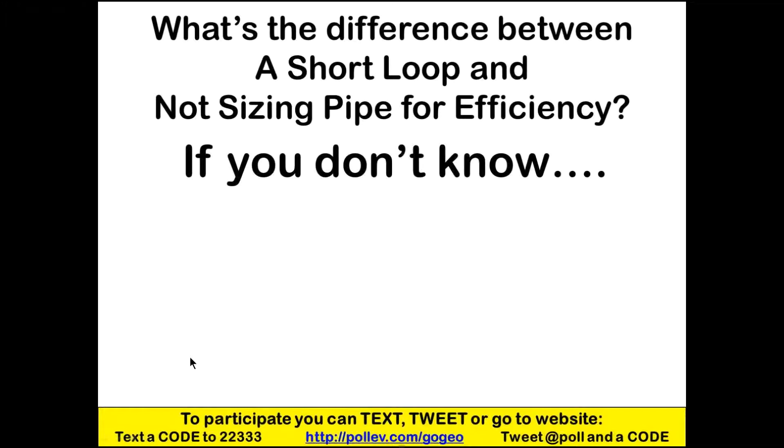Anybody in the geothermal industry knows not to short a loop. You've got to have adequate loop to keep the temperatures in that range that we have deemed acceptable in the industry, roughly 30 to 95 degrees. If you can stay within that, you're doing okay. But if you can't answer this question, then in addition to not shopping for eggs, I would not want you to design my geothermal system.

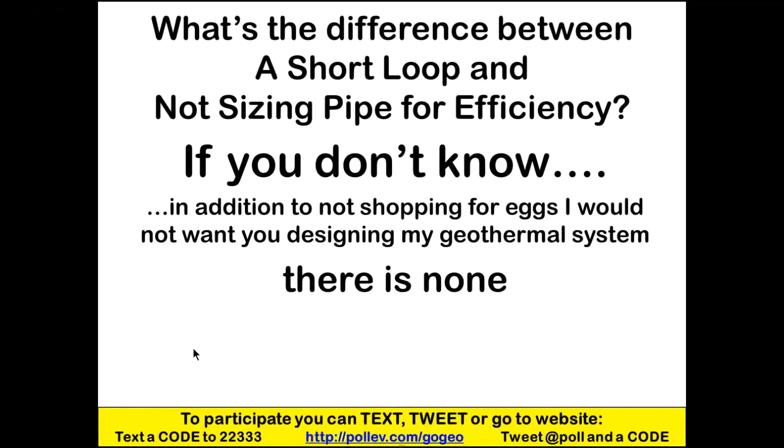Because frankly, there is no difference between a short loop and not sizing pipe for efficiency. Customers are paying way too much money for a geothermal system to end up with undersized pipes because that's the way we do it. They both cheat your customer.

CV, it's a term we often see on valve spec sheets. It's quite an interesting concept. And now I'm going to ask you guys, can you tell me what a CV is? What is our level of competence?

Often referred to as a flow coefficient. And knowing what it means and how to use it is very important in the design process. So I'm glad we've got an honest group of folks out there, because quite honestly, when I talk to folks, they don't really know what it is.

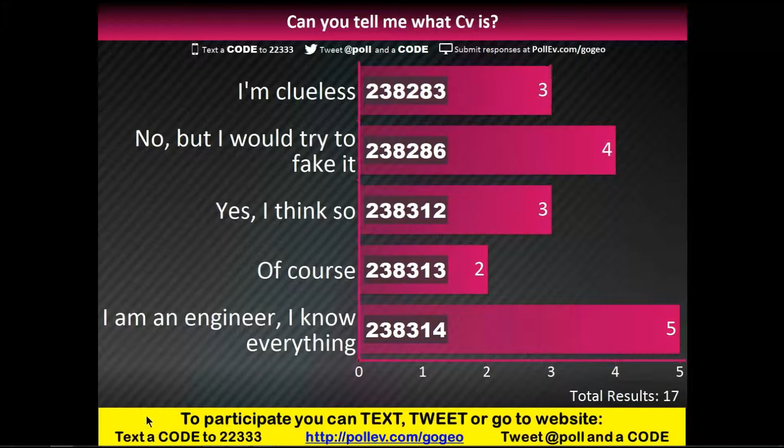So let me find my mouse again to click somewhere. There we are. It is the flow rate in gallons per minute at which the pressure drop equals 1 psi. It's very handy because if you know the CV rating, you also know that it correlates to 1 psi. And from those two data points, you can calculate a pressure drop rather easily.

So in this graph, I've illustrated this 100% to be the CV. You may have a valve with a CV of 20. So that means at 20 GPM, you've got a pressure drop of 1 psi. And if we double the flow rate, indeed, our pressure drop goes up by a factor of 4. It's going to obey that squared relationship.

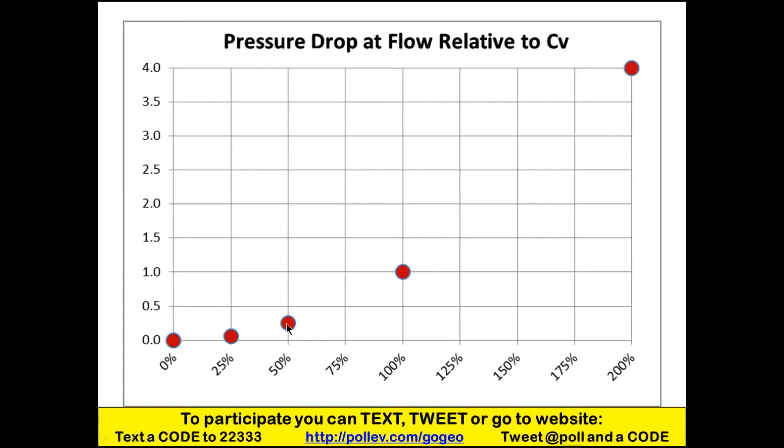And if we reduce the flow rate to perhaps half, 0.5 squared is 0.25, which now gets our pressure drop down to 0.25 psi. So starting with this value right here, which is your CV rating, down here, could be 10, could be 20, could be 200. But starting from that point, you can reduce the flow rate through that device, and the pressure drop will drop according to this parabolic relationship.

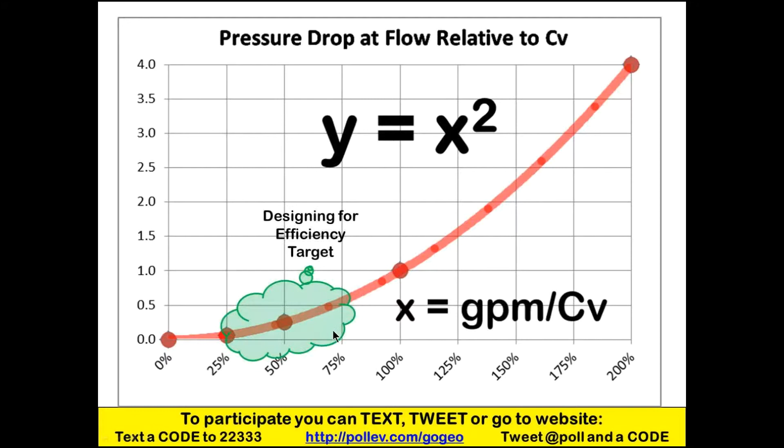And I'm suggesting that we want to design systems so that every element of the system - and CVs are not applied only to valves, they are also applied, you can calculate a CV for everything. A heat pump could be expressed as a CV, pipe, lengths of pipe. So my point is, stay on top of those CV numbers for elements in your system and try to pick a size that allows you to stay down in this regime.

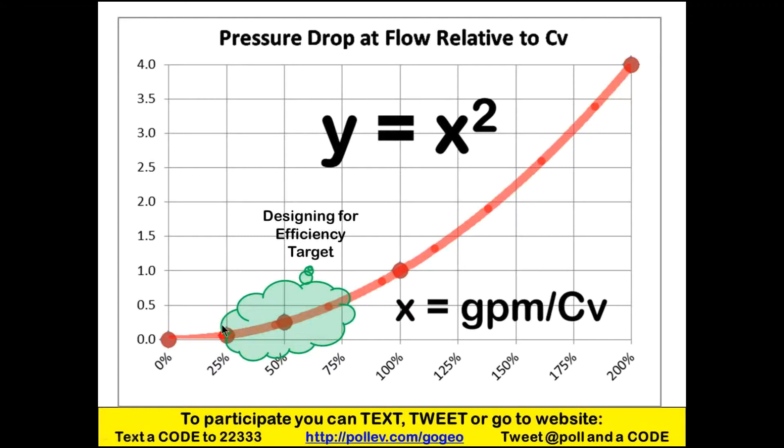Now, how do you size your pipes? It's a question I ask all the contractors that I deal with. Well, how are you picking that size? It could be by experience, I simply know what size to use. And I'll tell you, there's a lot of guys out there that'll tell you that.

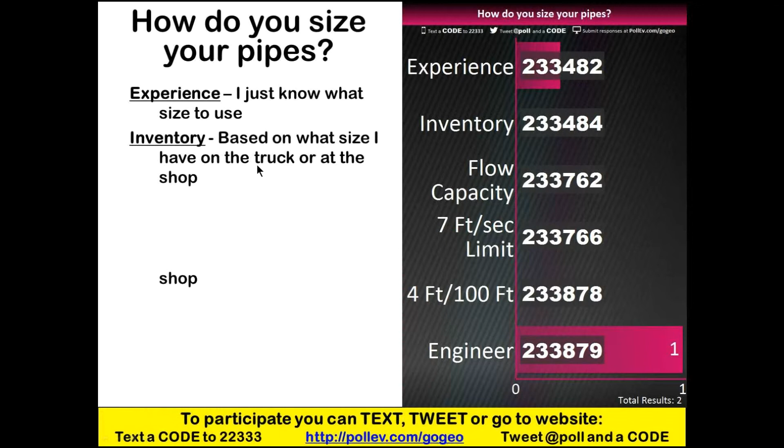Inventory. Oh boy, that all too often becomes the selection means. What do I have in the truck? What do I have in the shop? What can I get right away? So we end up picking pipe sizes that may end up penalizing a system.

How about flow capacity? Sort of like experience. Everybody believes that a certain pipe can handle so much flow, and it's strictly based on diameter. 7 feet per second is one of those boundaries that we often define not to exceed that high a velocity. 4 feet per 100, one of the most common design practices in the engineering community.

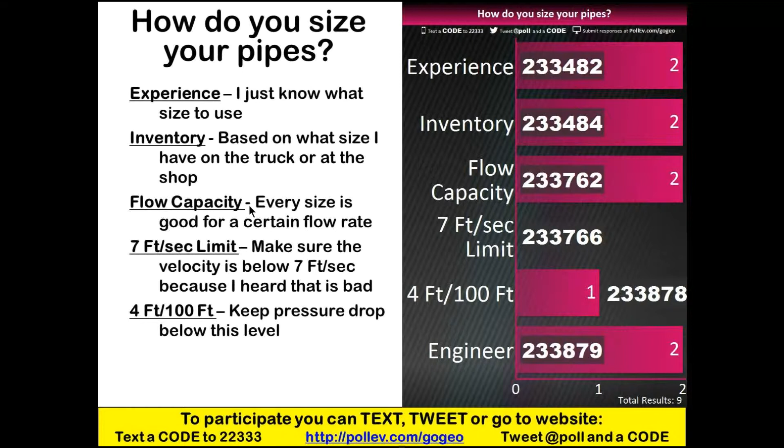And of course, the engineer. And we all believe what he tells us. So indeed, it's all over the place.

And what I'm going to suggest to you is that none of these are right. You really have to look at the application, the length of pipe. You cannot afford to run 1,000 feet in a pipe that gives you a pressure drop of 4 feet per 100. That's 40 feet of head loss just because you got to go a long ways.

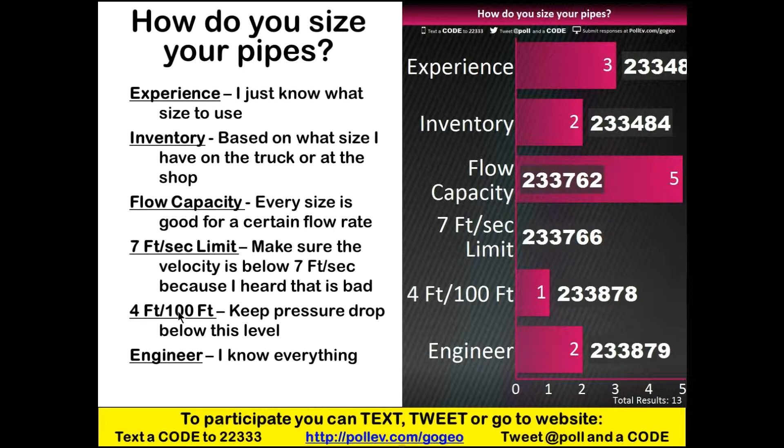Geothermal deserves better. Because not all pipe materials are the same.

High density polyethylene DR11 is pretty much the norm in our industry. And with the introduction of PE 4710 or the ISO standard PE 100, these are the stronger resins, and we're seeing a movement towards a little thinner wall as a result. We can do copper piping inside the building. Certainly outside the building, only HDPE. Inside the building, we have a lot of choices. And the question is, how do these affect the performance of the system?

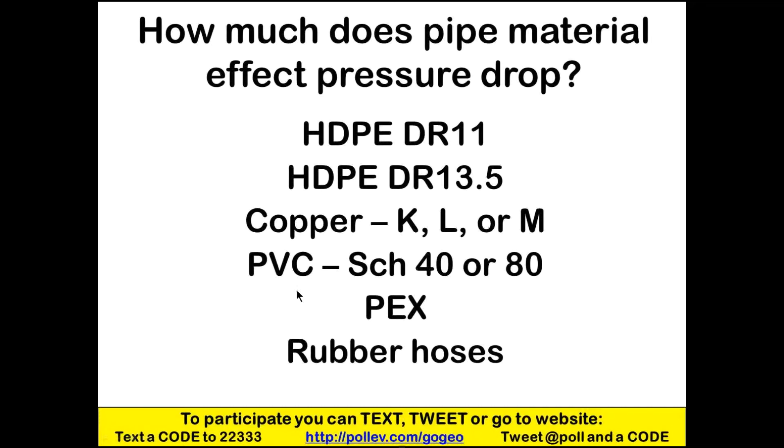You notice I didn't even put steel on here because frankly, I don't like to see steel pipe in a geothermal system. But anyway, here's a table illustrating the inside diameters of the various pipe materials for the smaller pipe sizes. Now granted, as you get into the bigger pipe sizes, you won't see the big variation in diameters as much, but this sort of illustrates my point.

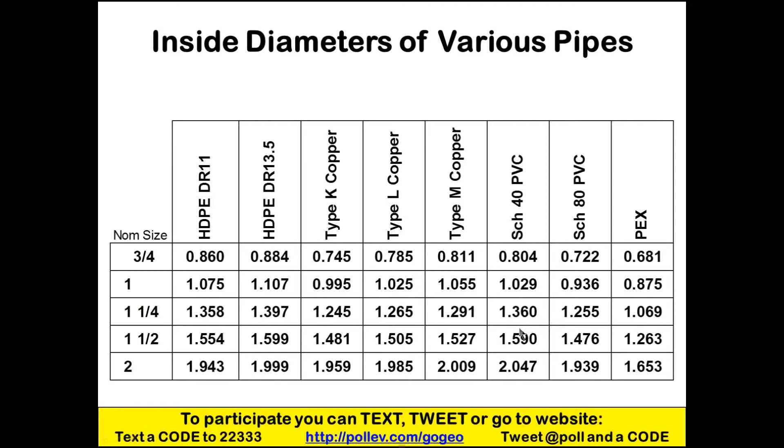And I, for one, can't determine a whole lot from a bunch of numbers just by looking at it. So let me do this. If it's smaller than DR11 HDPE, I put the red background. If it's bigger, I'll put the green background. So we've got PEX tubing over here that is a good 20% smaller inside diameter for the same nominal size.

A lot of guys use PVC, and it makes them feel better to use Schedule 80 because it's stronger, it'll hold up better. But they're paying a big price because Schedule 80 will have a much smaller inside diameter. What happens to the CV of a given length of pipe? Our CVs for Schedule 80 PVC are a good 20-30% lower, so they can accommodate 20% less flow and have the same pressure drop as DR11 polyethylene.

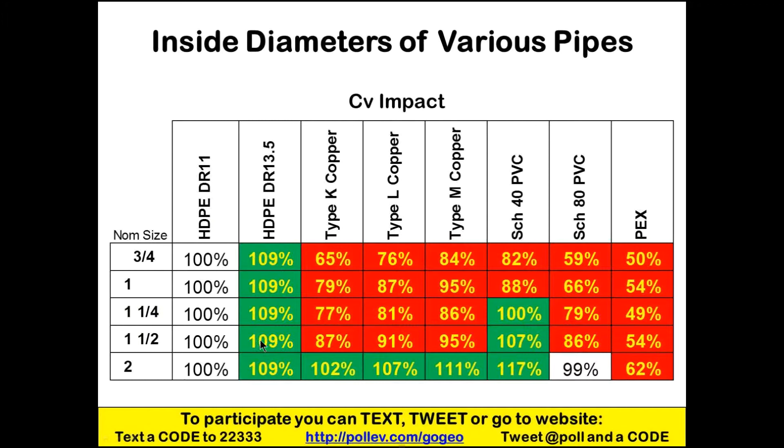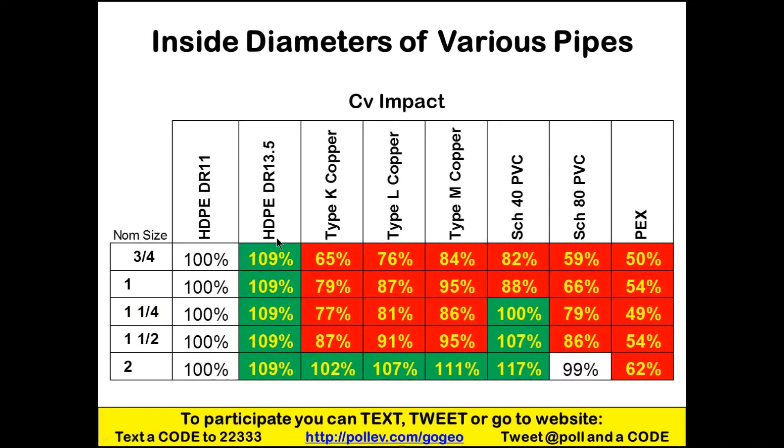What's interesting, you can see the simple move to go to 13.5 dimension ratio, we open up 9-10% more flow capacity at the same pressure drop. And there's fundamentally less material in the pipe. Now, it won't necessarily cost less because the pipe manufacturers have figured out that using the stronger resin deserves a little higher price, but indeed it is less material, more sustainable.

Looking at pressure drop impact, basically inverting the CV, we can see the pressure drops could be 15, 20, 30%, even 200% higher for different materials. So you can't simply pick a nominal size and say it's good for a certain flow rate.

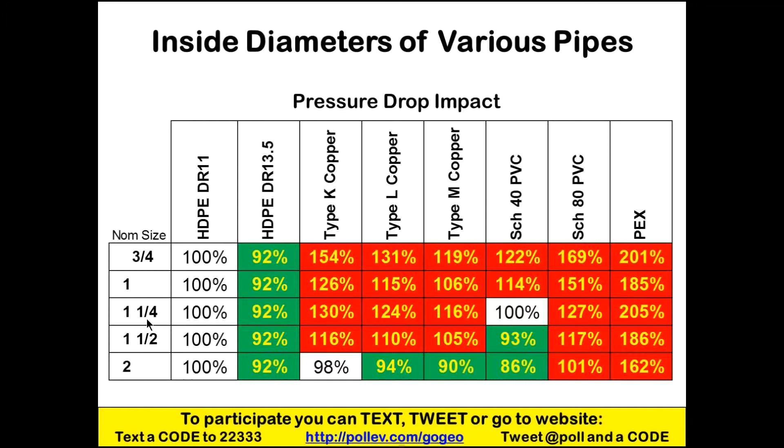Pipe sizing for geothermal. Don't cheat your customer. Be generous with pipe size. Yes, it's going to cost him more money. But guess what? The entire geothermal system is going to cost him more money. And he's not buying the word geothermal. He's buying performance.

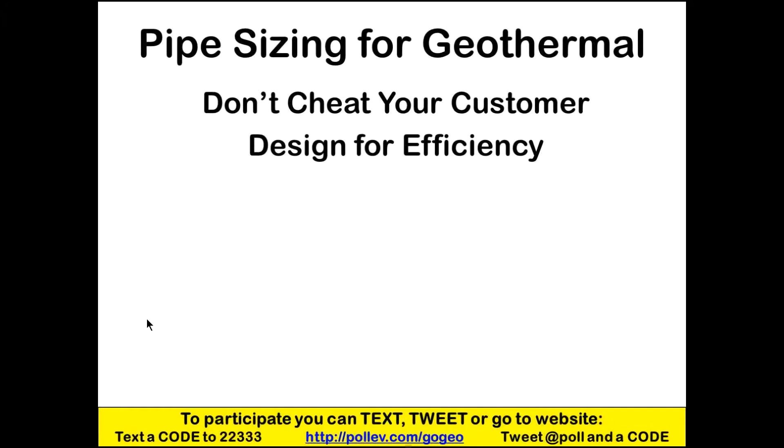Design for efficiency. Critically important. Geothermal deserves this. The interest in geothermal pertains to performance. Therefore, sizing pipes is critical, and based on length and material, a diameter can be selected to maximize pumping efficiency, and it all comes back to the pump horsepower required to achieve the flows we need.

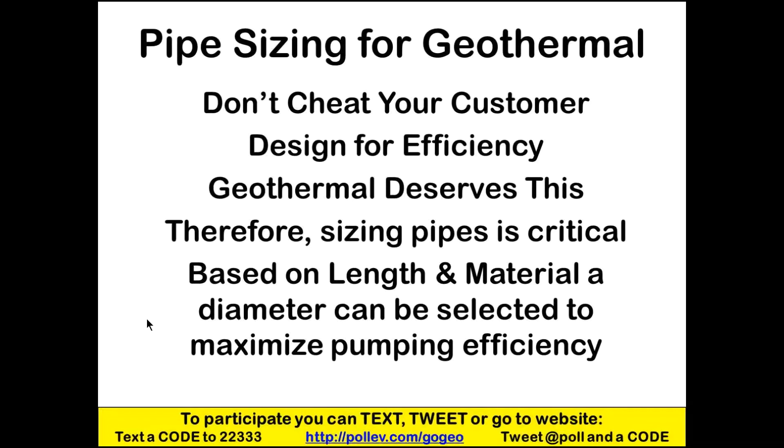I actually did an energy audit on a geothermal system in Pennsylvania. It ended up costing more to operate the circulating pumps than it did all the heat pumps combined. To call that system geothermal is inappropriate.

So how important is this? Let's do a little quiz here. For a typical 3-ton water-to-air application in a house, how much could the seasonal COP improve by simply designing the piping so that a single 26-99 Grundfos circulator could be used instead of 2? Our industry always identifies 3-ton as being in that gray area, where sometimes we need 2 pumps, sometimes 1 pump will work. So if some of you could weigh in, we'd appreciate it. How important is this issue?

I think we've got a lot of folks out there with some insight that indeed sizing the pipe and lowering pumping energy can be very significant. Excellent, I'd like to see that.

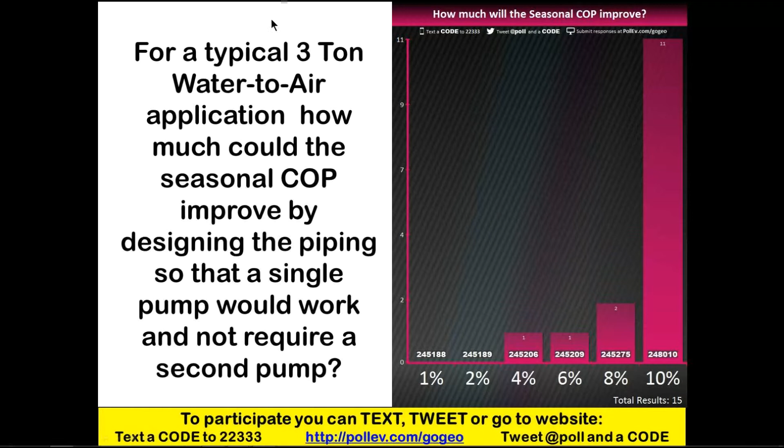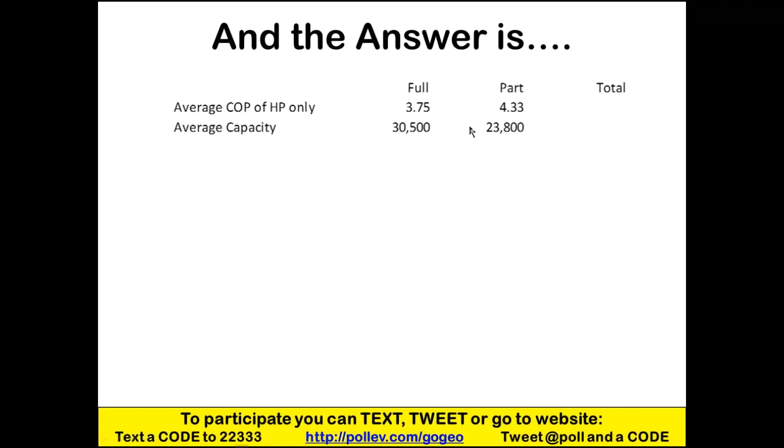And the answer is, let's take the average COP of the heat pump only, and this is real data: 3.75 COP under full capacity, 4.33 under part load, here's your average capacity. Annual run hours per year, you might get 700 hours a year on full load, 1,800 on part load, for a total of 2,500 hours a year in operation. The BTUs delivered, we do the math, 700 times 30,000, we get roughly 21 million on full capacity, nearly 43 million BTUs on part load, for a total of 64 million BTUs.

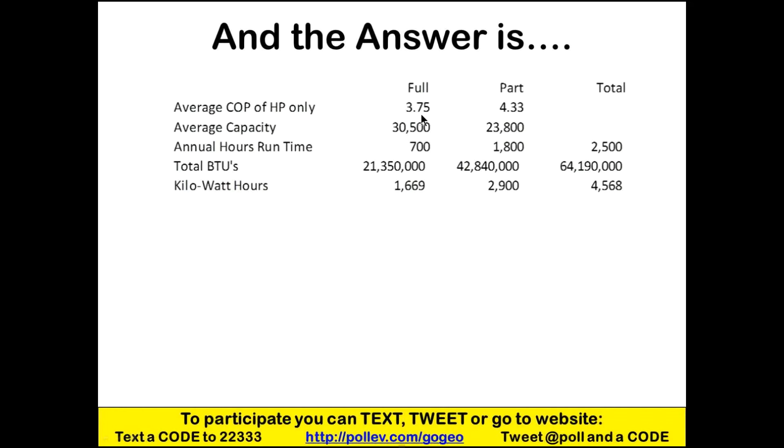And that's pretty typical, it's roughly 20 million BTUs a year per ton in a normal application, heating in the northern climates. You can look at the kilowatt hours based on capacity and COP. Here's the kilowatt hours, and we add those up. So for a season, the heat pump by itself will have a COP of 4.12, dividing total BTUs by total kilowatt hours gives us the COP.

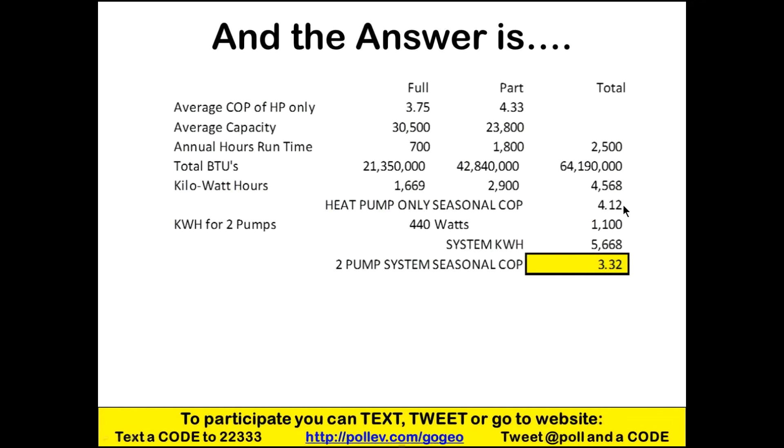Now, the kilowatt hours for 2 pumps at 440 watts per pump turns out to be 1,100 kilowatt hours a year, and we have to add that to the system. We recalculate our COP, and indeed the 2 pumps will drop the COP from 4.12 down to 3.32. If we could get away with 1 pump at 220 watts, it's only 550 kilowatt hours. Our new total COP is now 3.7.

So we can, with a net increase of over 10%, by simply maybe going to 1.25 inches instead of 1 inch here or there, or looking at the loop field design instead of 1,000 feet of 3/4 inch, bring it back to 800 or 600. We could even do 500, but maybe add another circuit, so we'd have 4 circuits instead of 3. There are design choices. I have a contractor in Buffalo, New York, who designs and gets away with 1 pump on 5-ton systems.

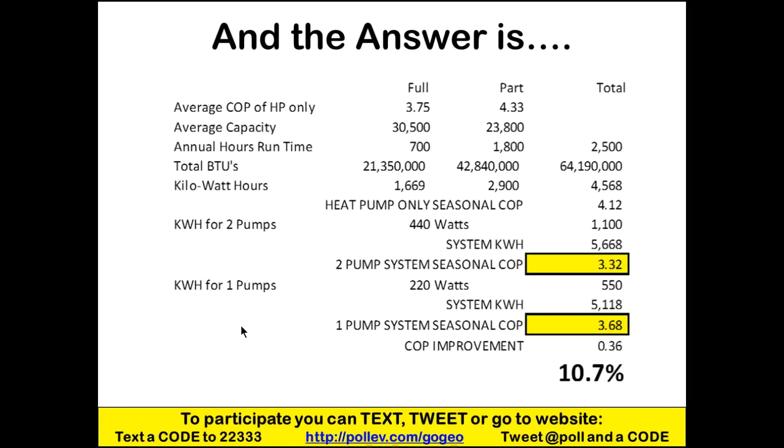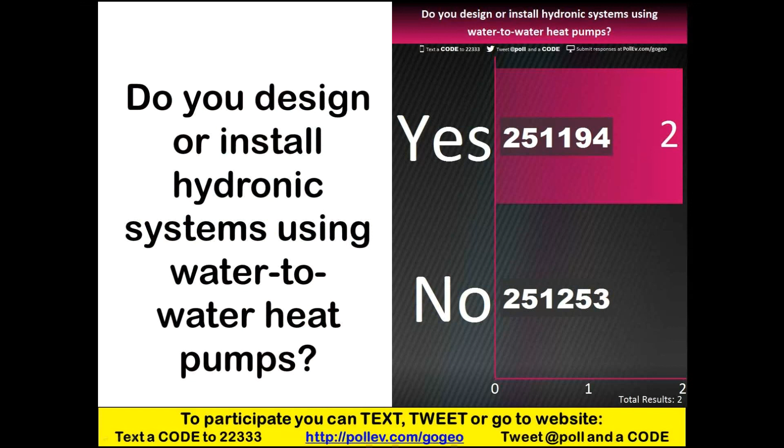So, question: do you design or install hydronic systems using water-to-water heat pumps? Certainly hydronics up in Wisconsin, Minnesota is very popular.